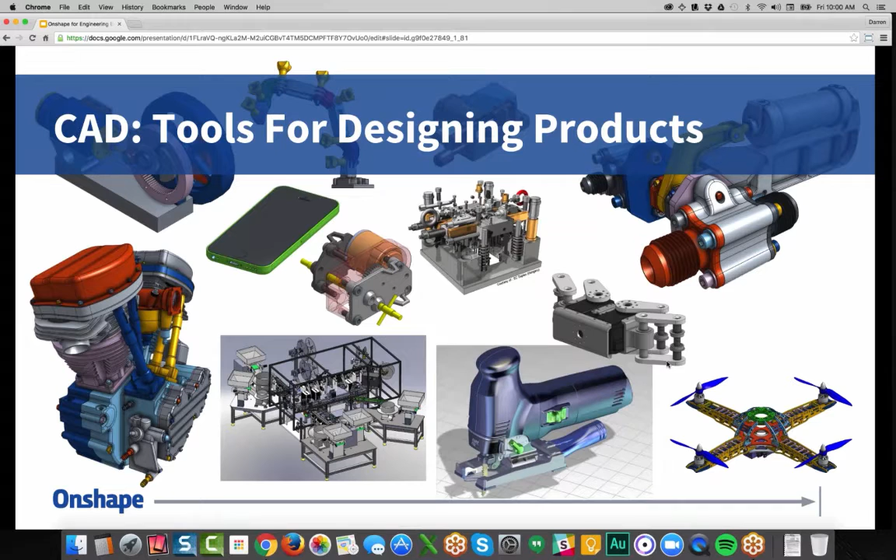Mainly, it's computationally intensive. There's a lot of graphic data, and you traditionally needed a high-power workstation to run these applications. We feel now that the internet, the bandwidth speeds, and the computational power can support 3D product development, and that's why it's an area which we're focused on. In fact, Onshape's the only company 100% focused on cloud and mobile CAD.

Now, the good news is that there's thousands of companies already doing production level work inside Onshape, and it's an area that's being heavily embraced. And if you look at our history, we were founded in 2012. We have a rich history in CAD. I'll talk about the pedigree of our company in a second.

But what's interesting is this is a movement that has caught the attention of some serious investors and experts in the high-tech field. In Silicon Valley, a number of companies have backed Onshape based off their vision. They agree with and support our vision of moving CAD into the cloud. We've raised over $169 million in venture capital. Right now, we have about 100 employees.

We're based on the outskirts of Boston, and the development team is not only CAD veterans, but experts in cloud architecture, data centers, and mobile computing. Now, I won't go through all these people, but if you're familiar with the history of mainstream 3D CAD, you may know a lot of our executives. The guy in the middle, Jon Hirschtick, was the founder of SolidWorks. He is our co-founder and chairman, and there's other executives that had tenure at SolidWorks during the early years.

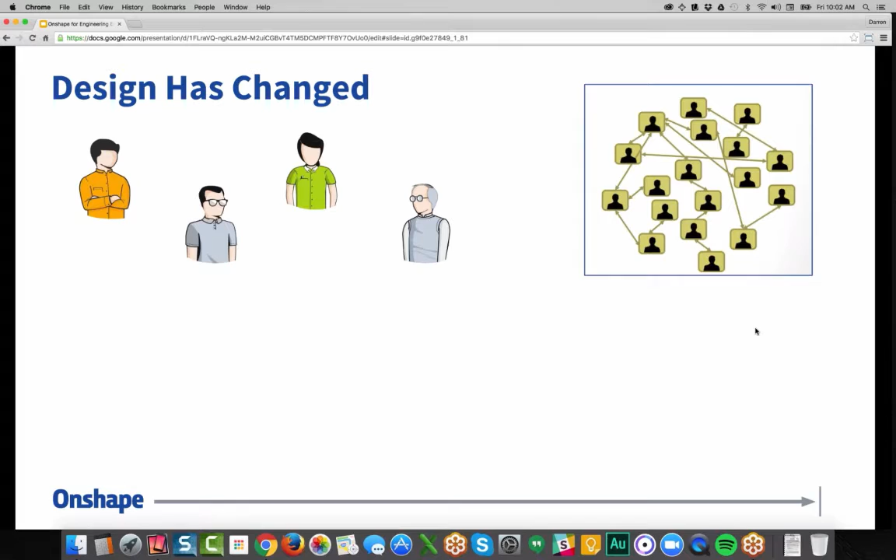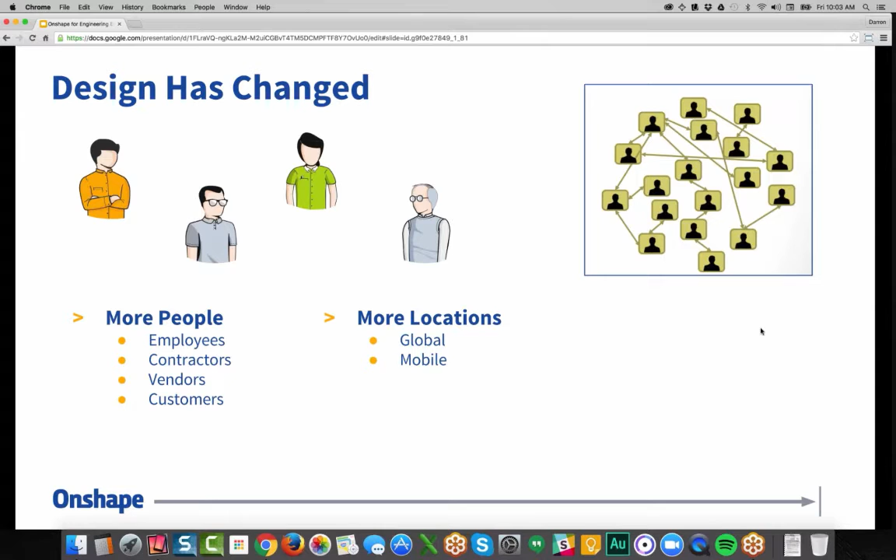You know, when we look at the world, and I was actually just reviewing some manufacturing standards that have changed, and they've changed because the world is becoming more complex for manufacturers. The supply chains include more employees, more contractors, vendors, and customers. The locations of manufacturers today, they've gone global and they're distributed. People are hiring based off talent, not location. So, the internet connectivity allows you to have both remote employees and global customer bases.

And we feel that with the speed of innovation there's constant pressure to increase your speed, your time to market, increase the amount of innovation you're doing on a product. You need to show that you can collaborate, and you need to show that you're very agile. Manufacturers today are seeing pressure not only from competition, but also small startups that have innovative twists on products because of micro factories, and someone can be very disruptive to the marketplace.

So we see a greater pressure for companies to innovate, and we see some challenges with the complex supply chain as well as the distributed workforce. And we think that traditional file-based CAD just offers a lot of friction when you're trying to evolve and handle these distributed supply chains as well as these new pressures to innovate. And let me explain why, and I think this will resonate with most people on this call.

You have an installed CAD system, and right away that causes friction. There's $5,000 license fees. Even if you hired an intern and had to get them up to speed on a piece of software, you're talking an out-of-pocket cost. There's a tremendous IT overhead, downloads, installs, updates, and these don't occur just once a year. These occur multiple times in a year if you wanted to stay up to date with the latest and greatest software.

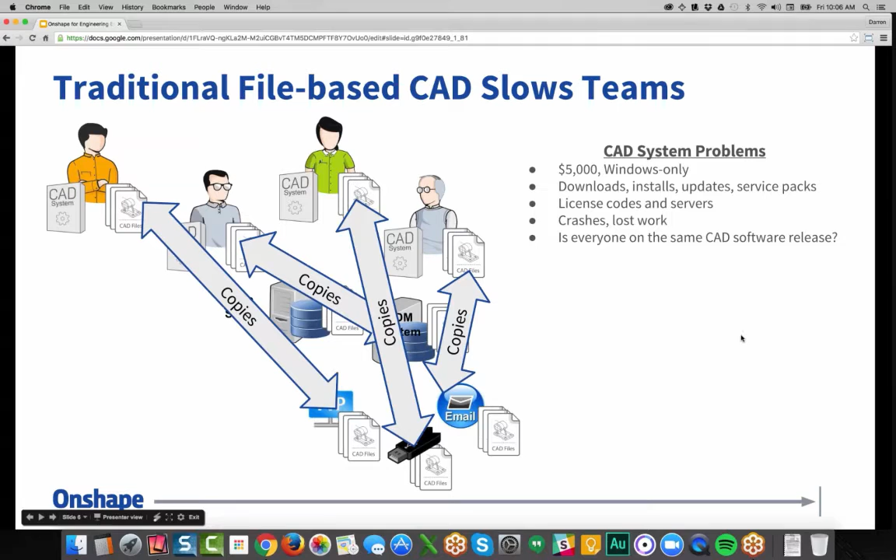When you add the data to the picture, you begin to realize, wow, people are creating data on their own computers. And then when they want to share it, they come up with different mechanisms, whether that be email, thumb drives, FTP, or maybe they put in file servers and PDM. All of these rely on copies, and that also causes problems, right? You're copying CAD back and forth to servers. You're emailing copies. You're FTPing copies of data.

And what happens is you then need to have complexity in ensuring that people have the latest version of the file. You're not overwriting someone else's work. Someone else doesn't have it locked and you need write access. It becomes a nightmare of just managing. And in many cases, the processes you put in place to manage your data can impact the speed at which you can innovate.

People are putting in now cloud drives. That has sort of sped sharing of data, but it's still working with copies. And you still have those problems with latest versions. Are you writing over someone else's work? Are two people working on different files? And then you have to do redundant work to sort of merge their changes.

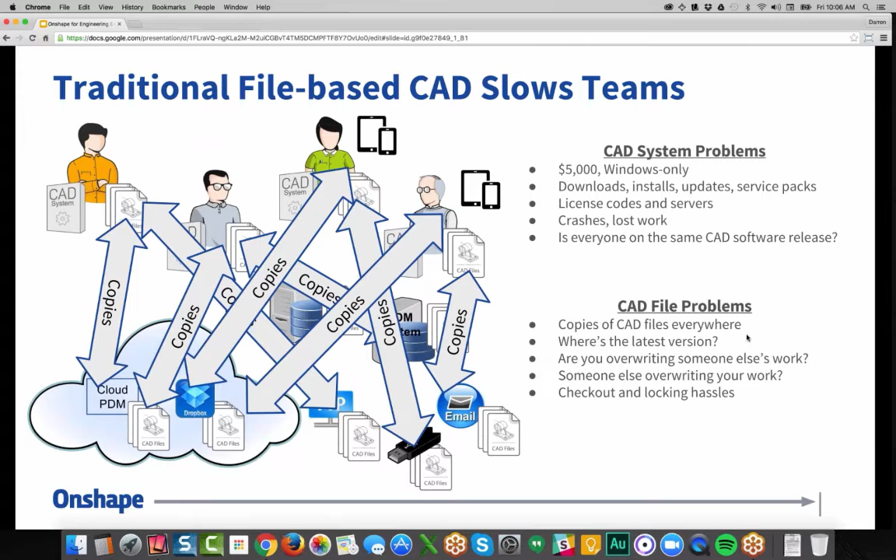So those are the hassles that we feel traditional file-based CAD has, and we think we can eliminate completely with a full cloud solution. And that's where Onshape comes in. The CAD system and the CAD data all reside in the same location. We're not a file-based system. We work off a database. And the beauty of this is everyone accesses the same CAD system.

There's no file incompatibilities. And when you share data, everyone works with a single database. So there's no need to do the redundant copies, and you don't have the management nightmare associated with that. Do I have the latest version? Of course you do, because you're working with the latest version. Everybody works with the latest version.

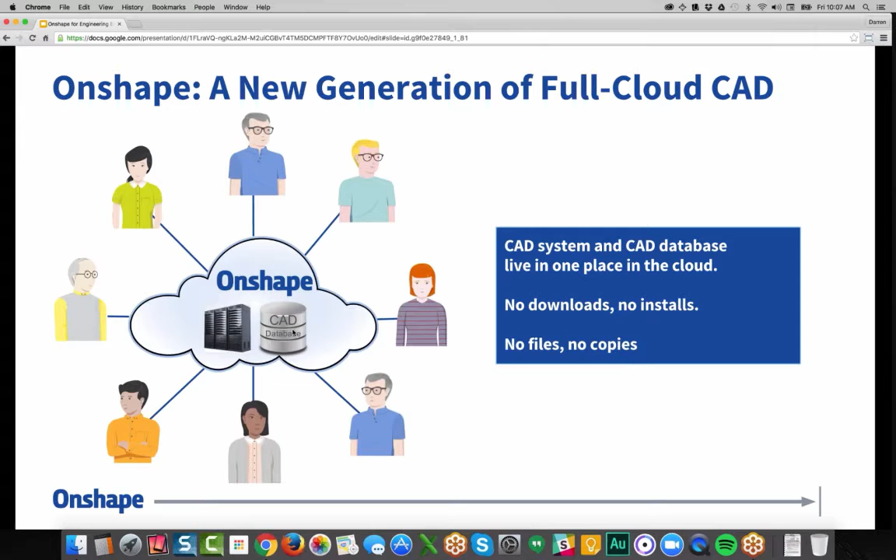Do I have the latest version of the software? Of course you do. Everyone on the planet will work with the same version of Onshape. Even as we do updates, everyone's updated simultaneously. Let me talk a little bit about updates.

We're a very nimble company, and we're putting out rich functionality every 3 weeks. This was 2015. We were in our beta period. We put out 14 updates, 125 new features. New features, now that's what a user would perceive as enhancements to the actual functionality. Of course, many more enhancements are done behind the product.

Okay, so the other thing, if you're not familiar, people then ask, well, what about the full manufacturing picture, simulation, CAM, and rendering? Well, guess what? We have an app store, and companies see the value of Onshape, and they're investing in integrations. We just launched this app store in Q1 of this year. We already have over 33 partners, and if you go to our app store, you'll notice that they include simulation, CAM, rendering, part libraries, all your standard parts and supplier content. There's productivity tools, everything like time cards and calculators. And then there's data translation tools, so you can quickly print or maybe export.

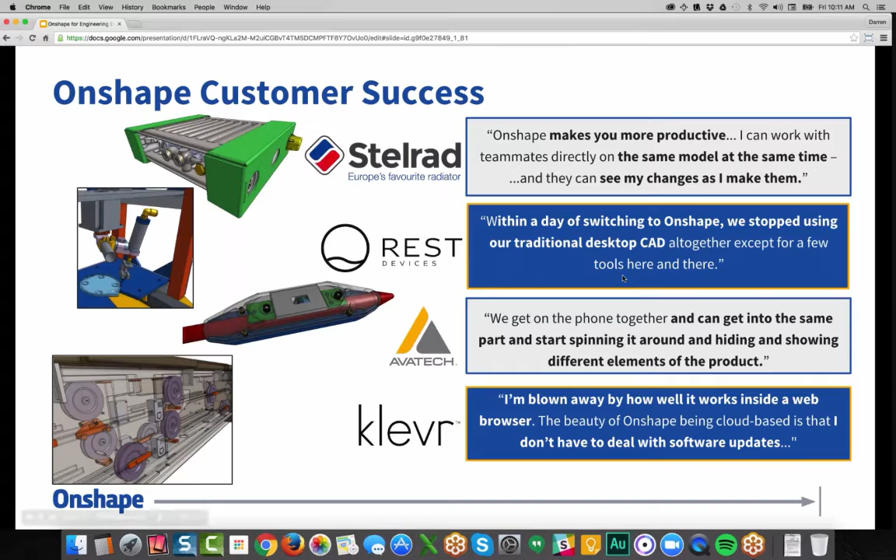So we're approaching over 1 million hours. Actually, we're over 1 million hours now of Onshape usage. People are doing production work. And we wanted to know the benefits that engineering leadership is seeing with full cloud CAD, where they see the benefits, and we wanted to give you some insight on how to start projects in Onshape. So that's what the remainder of this presentation will be, and I'll bounce in and out of this slide deck to show you. But the first thing that engineering leadership is telling us is that teams work faster in Onshape, and there's a specific reason why.

It's because with traditional CAD, the cycle of development is very serial, meaning people work in stages, one stage at a time. But with Onshape, you can work in parallel. And there's a specific reason for that, and it has to do with our technology. We allow multiple people to work on the same model at the same time, whether that be assembly or part. And that allows you to do things in parallel. It's that whole copy problem. You're not worried about overwriting other people's files. You're not worried about check in, check out with Onshape.

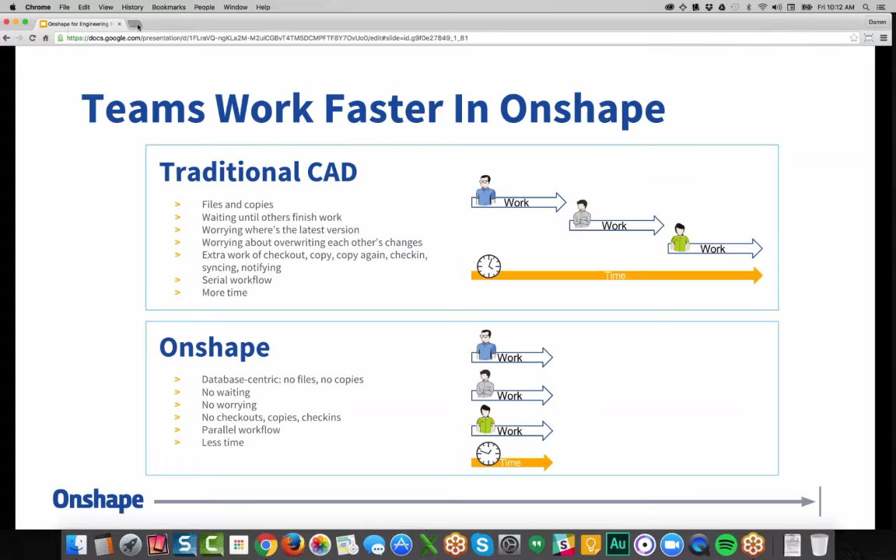And let me show you, if you haven't seen it, what that looks like. So right now we're in a Chrome browser window. I'm running the Google slide, and I'm going to go right to Onshape and sign in. Now, if you haven't seen our interface, these are projects. And I'll go to this project here, which is a rather large one. It's a casting in a manufacturing fixture.

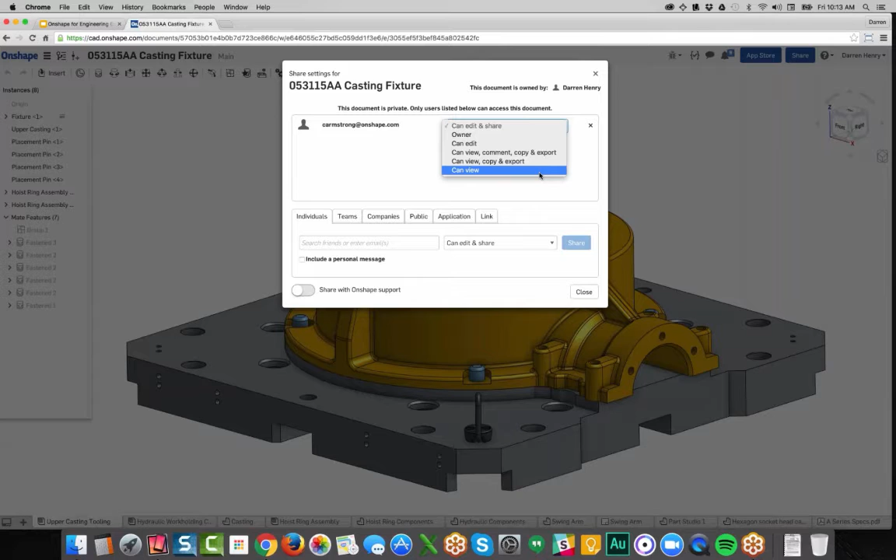What I'd like to show you is that any document you see here is a full CAD application running in your browser. Anytime you're working on a document, you can hit the share button and share with other people. In this case, I've shared with a peer of mine, Cody Armstrong, and you can set the permission on how they share. So I don't have to email Cody a file, I just share him into the one master version of this file up in the cloud, and Cody can join.

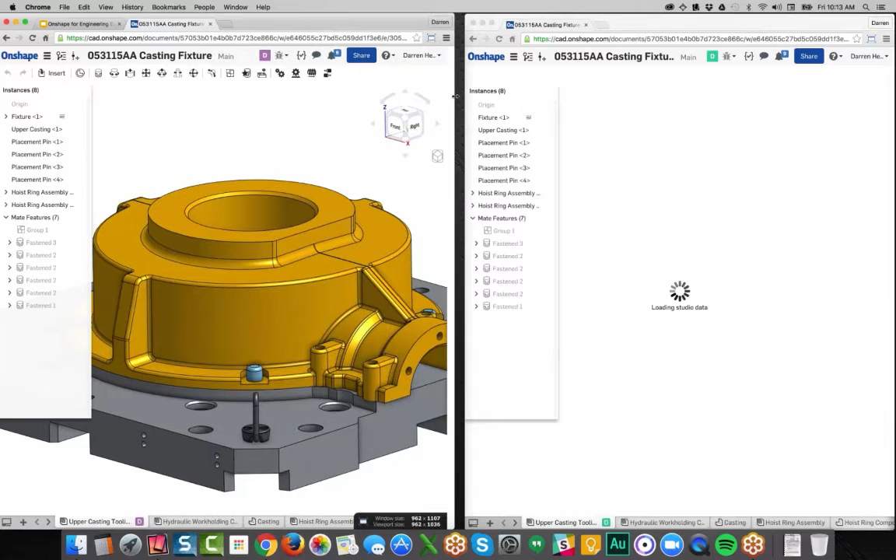I wanted to show you what that looks like, so I'm going to run two sessions simultaneously to show what it's like when two people are in one document together. We have Darren on the left and Darren on the right, and when someone joins the document, you can see their initial. So I have a pink Darren and a green Darren, and you'll just have to assume it's two different people working in two different locations.

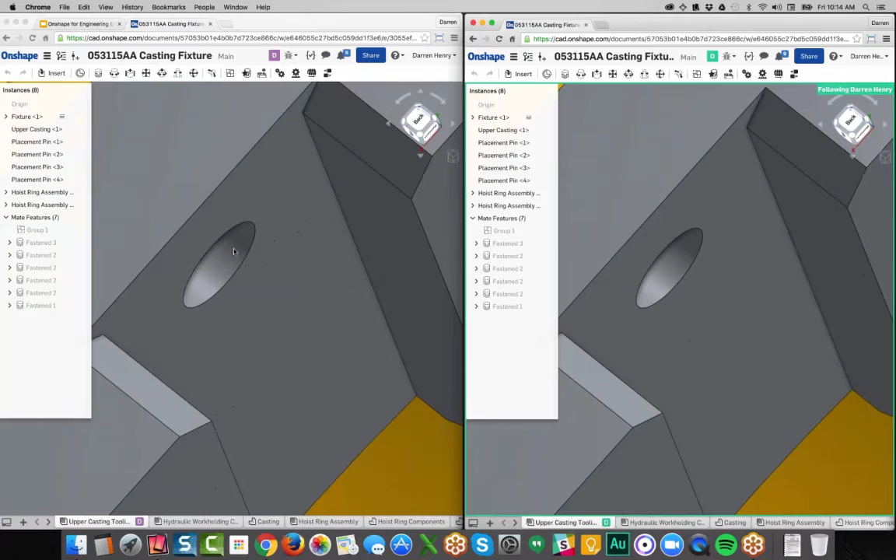One thing you'll notice is people can work on the same exact model with independent views. Now, if we were working together, maybe on a conference call, and we wanted to talk about this, we could sync our views. Just click the initial of the other person, and when that person rotates, you can see it too. So maybe we're talking about this positioning hole, and is it in the right location, that kind of thing. You can also work asynchronously - just click in the white space, and you'll have an independent view once again.

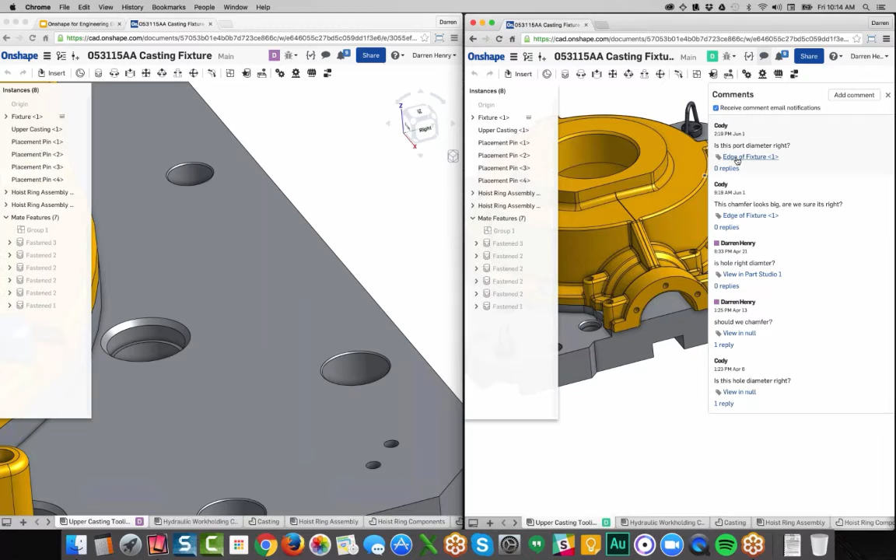Asynchronously, you can add chats and comments. Here, Cody added some comments earlier, asking if the port diameter is right. If I click that comment, it rotates exactly to the port, the orientation where he added that comment. So we don't have to work simultaneously, but we can. The important thing is no copies are needed - we're always working on the latest version of this model.

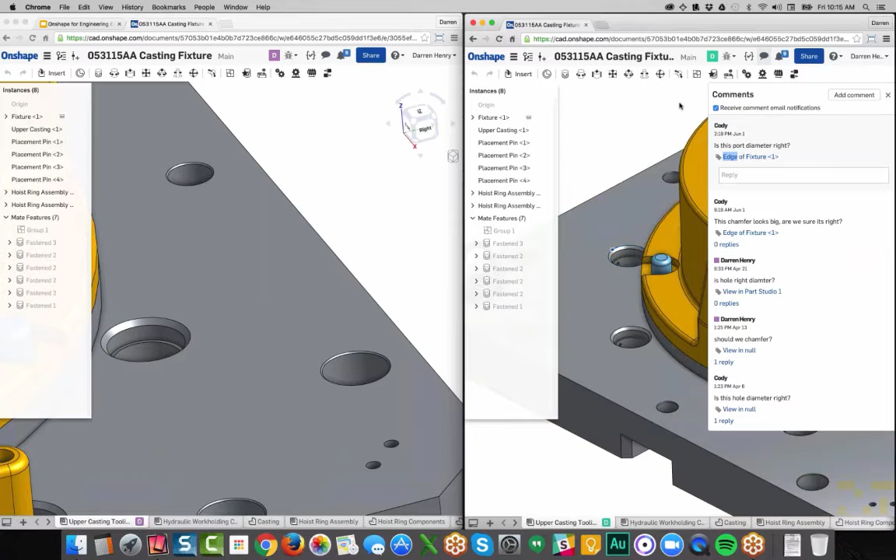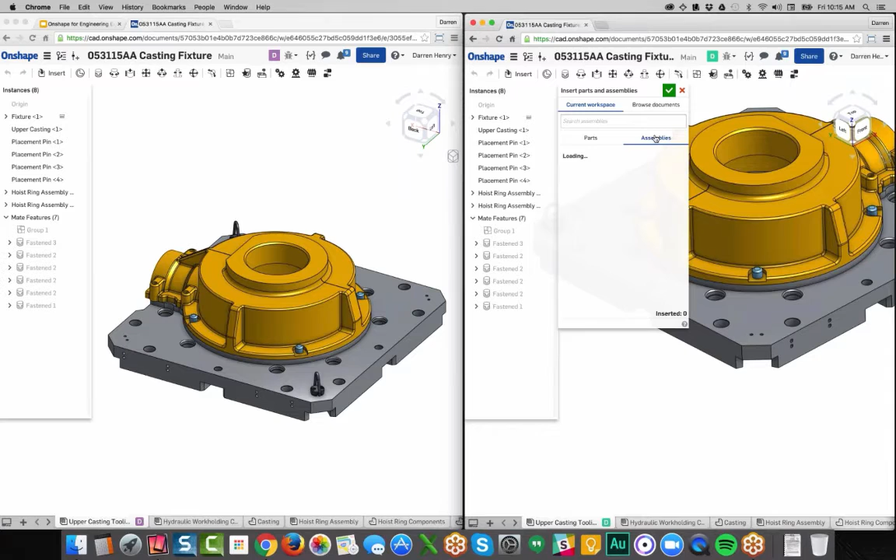But here's where it gets interesting, because we can work simultaneously. Let me go to an isometric view. So this is one view, one person working, and this is the other view. In this view over here, this person is going to insert a new work holding clamp. So we'll add this work holding clamp and place it out here in space, and the second I do that, you'll see that work holding clamp appear in the other person's screen.

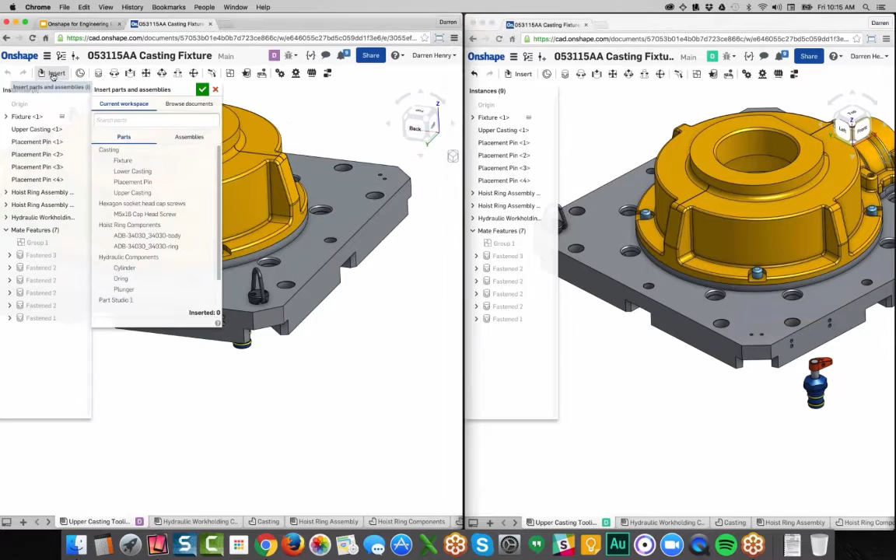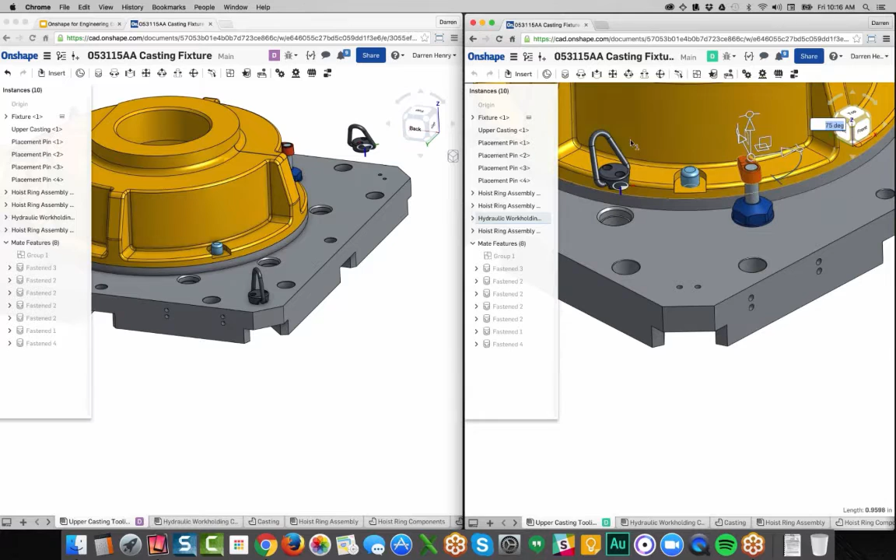We are working together. This person might insert a hoist ring over here, and when that person inserts that hoist ring, you can see it appear right here. This person may go ahead and fasten the work holding clamp into position. If you haven't seen us do this, it's really quite amazing - we just pick two points and solve, and you can see it's positioned correctly. You can rotate it around and position it in the right orientation, and you can see the clamp is now in the right orientation over here.

This person may go ahead and build upon the work of the person on the right, and maybe replicate that hydraulic work holding clamp into all of the hydraulic ports. So let's do that right now. You can see that, and when I accept, all the hydraulic clamps are over here.

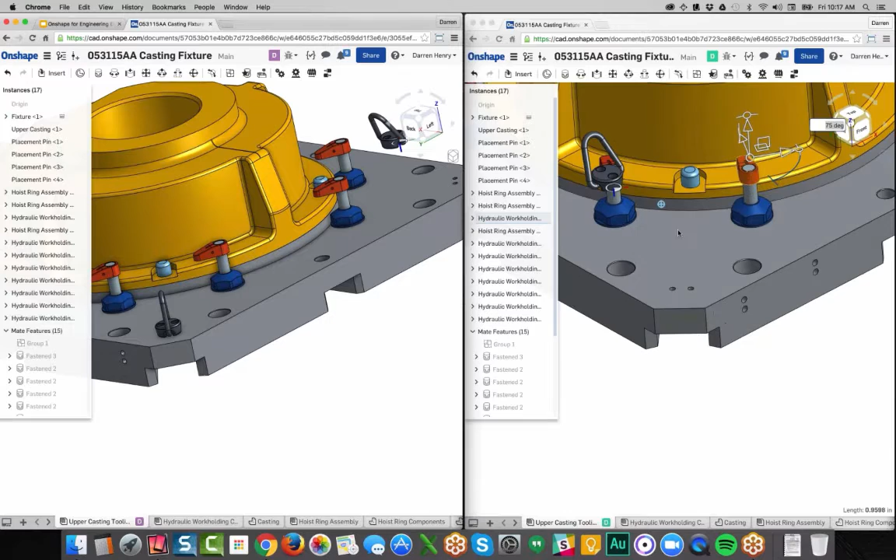Then, if there's any tedious work, like say a customer is coming in and you want to position these, or you're doing a rendering, we can work together. This person can quickly move this clamp into the right orientation, and this person could move another clamp into the right orientation. So we're sharing workloads, whether design workloads or assembly workloads. We can do it simultaneously in a shorter amount of time, and we're the only CAD solution we know of that allows this simultaneous editing.

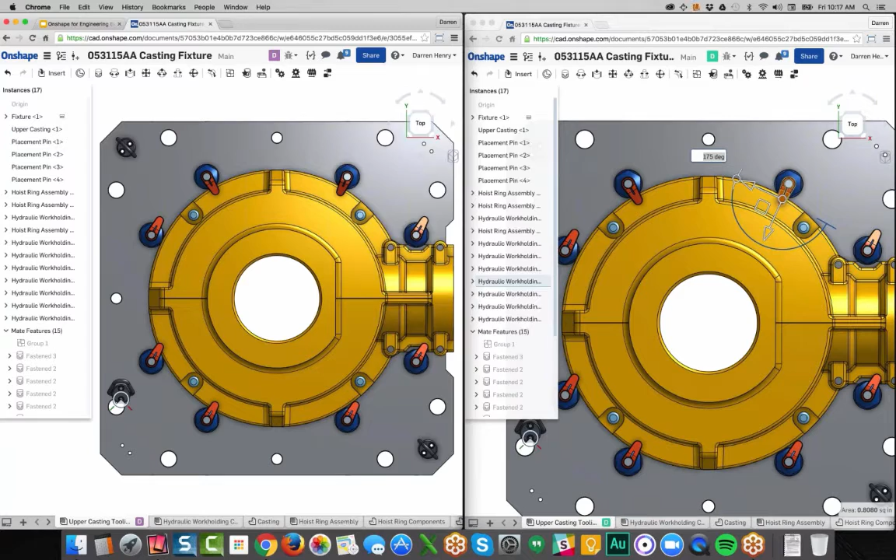It's really quite powerful. Just to take it one step further, I'd like to show you how we can access this on a phone as well. Onshape has apps that work on tablets and phones, and I'm trying to actually broadcast my iPhone to the screen. There it is. What I'll do is run the Onshape app.

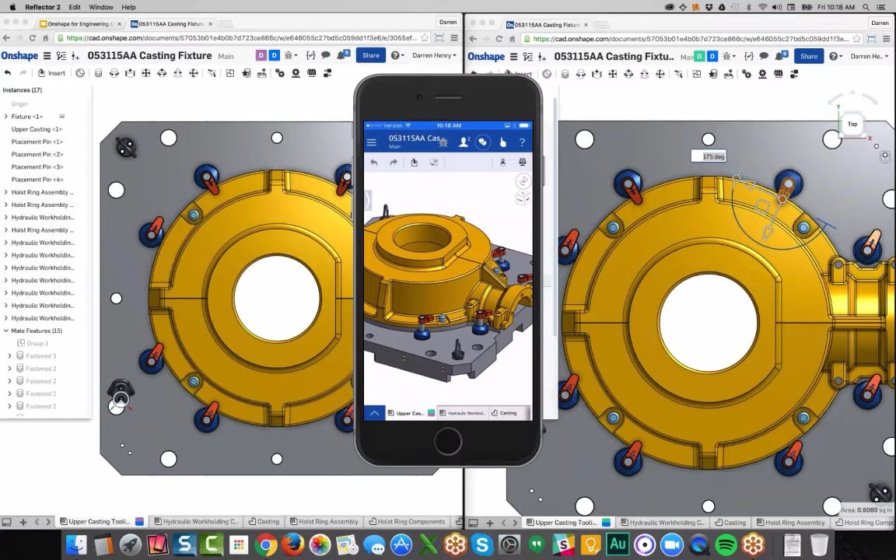Even though this is on a smartphone, we have the ability to use a full CAD system. We're leveraging the computational power of other computers, the Onshape servers, and it works extremely fast no matter what device you're on. We've optimized the interface for smartphones.

What I'm going to do is go to the swing arm. Here you can see the red swing arm in the rest of this fixture. Let's zoom in on it.

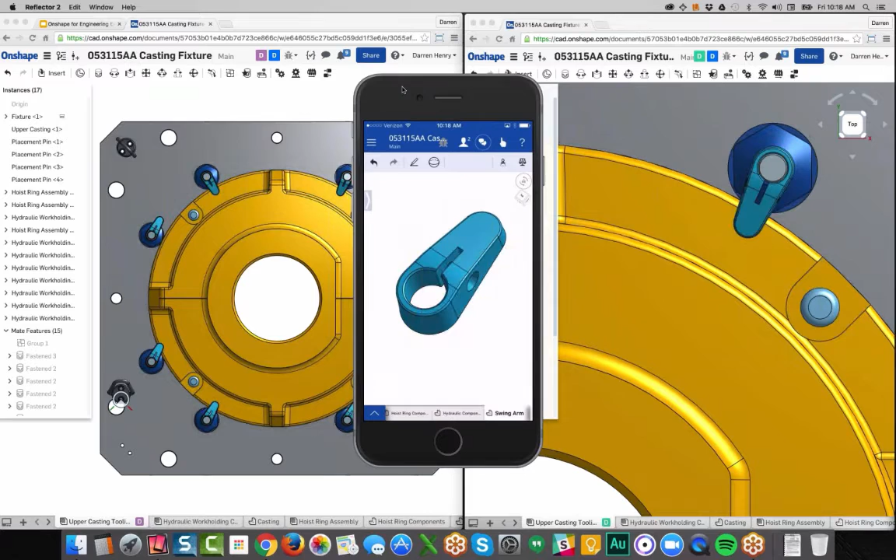You can see that even with mobile devices, we have the ability to work together. I'm just going to change this appearance to something slightly blue, and when I accept, you see that everyone's document updates.

This could literally be an engineer on the East Coast, an engineer on the West Coast, and somebody at a customer site editing data simultaneously together and saving cycles, because they're not waiting till they get back to the office, or waiting until someone else checks in a file before they can do their work. We're working together. I think this is a great example of the potential, and this is what companies that have embraced Onshape are recognizing as a huge benefit.

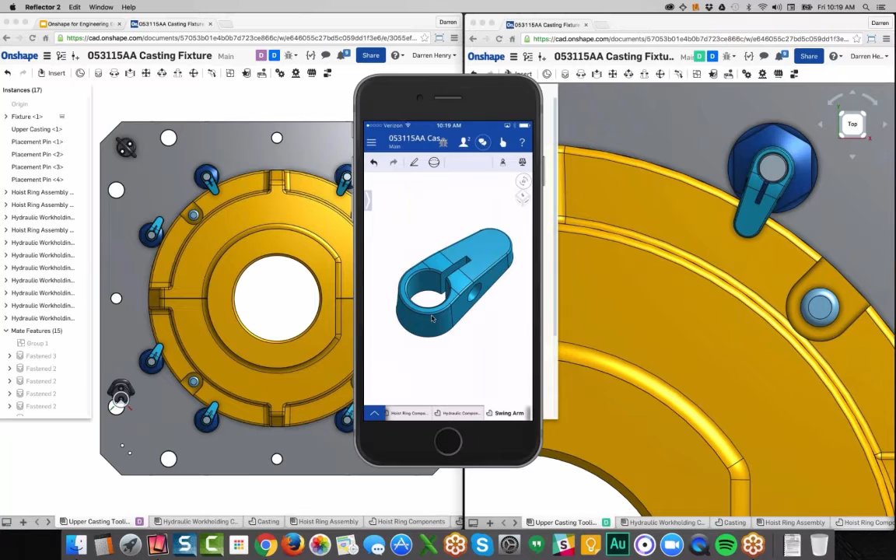Okay, let's go ahead and shut this window. I'll stretch this out and we'll continue the presentation and talk about the second benefit we're told exists, and that's better version control and faster iterations.

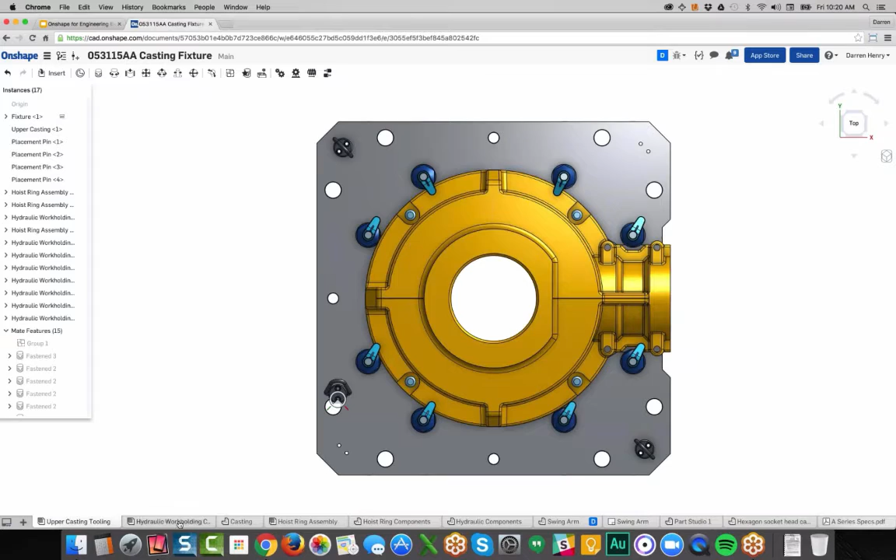Not only are we working together, but realize too that in Onshape we're storing all the project information in one location. It's not file-based. Here you can see we have not only the hydraulic work holding clamp, we have the hoist ring assembly. It's all stored together in this project.

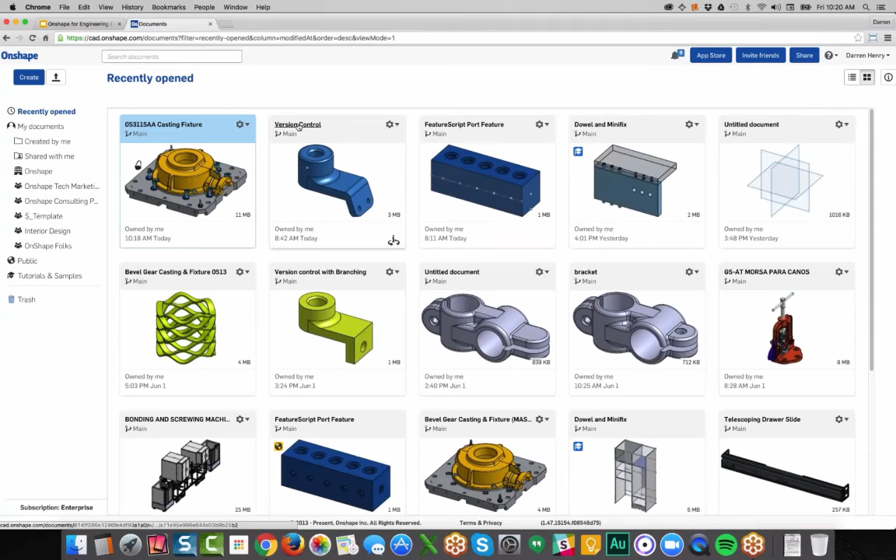As the project evolves and we're reaching milestones, everything is version controlled together. Version control is built in. Let me jump out of this document and go into a new document to talk about our version control capabilities. It's important to know that you never save in Onshape, and Onshape is constantly recording the history of every interaction you do.

You can restore to any point, any state, no matter how old the document is. I can restore to states from last year if the document was created last year. So you can recover - you've got really unlimited undo back to the origin of the actual model.

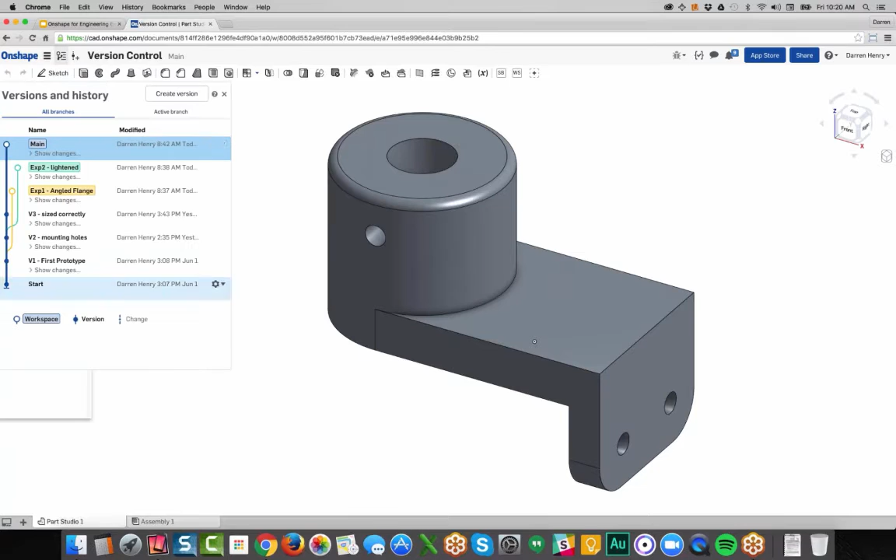But if you're not familiar with our version control, the idea is when you reach a milestone, you can create a view-only, write-protected version - what we call an immutable version. So it's always protected, you can always get back to that version, and everyone can see what the latest version is.

Look at our graphic tree if you haven't seen it. Let me make sure you're seeing this on GoToWebinar. So the dark circle represents versions, and the open circle represents work in progress.

We're not doing save-as-copy. It's all stored together - work in progress, different variations, as well as our versions, all stored in one location. So if I asked you, even if you're not familiar with our tree, what's the latest version? Chances are you'd say V3. It's the darkest circle at the top of the chain, and it tracks when that was created.

If I ask you how many versions have occurred in this history, you'll say 3. If I ask how many workspaces have occurred, you'll also say there's 3, and the latest is on top - it's our main one. These are stages, sort of bookmarked states of the model at different locations.

Think about what you would do in traditional CAD. You would do your different versions as you're evolving your product, and as you want to test variations, you would do save-as-copy, save-as-copy, save-as-copy.

So here we can look - the main version, the latest work in progress, is what you see here. It's a simple bracket. It does not have any fillets on the main body, but it does have fillets on the side.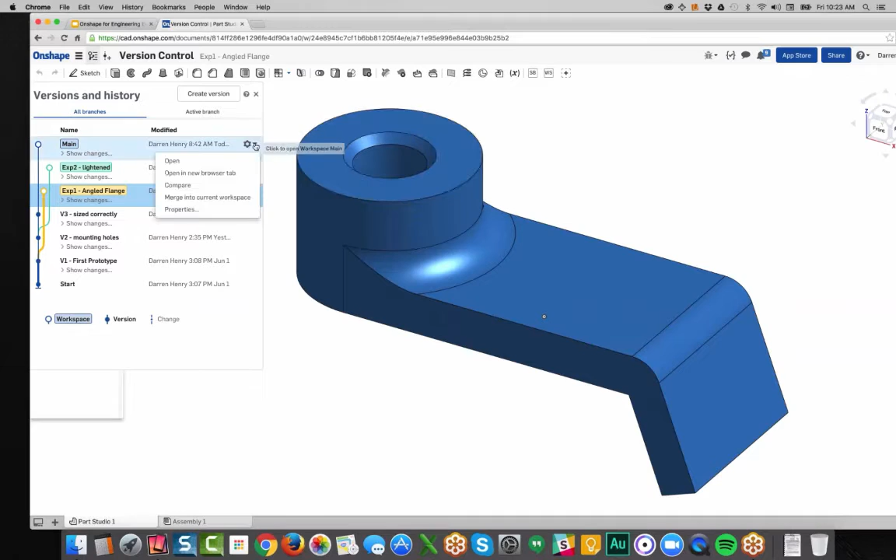Well, we can compare it. So let's do that right now. We're going to hit compare, and Onshape, because everything's stored together, can give you a visual comparison of two different states in the model.

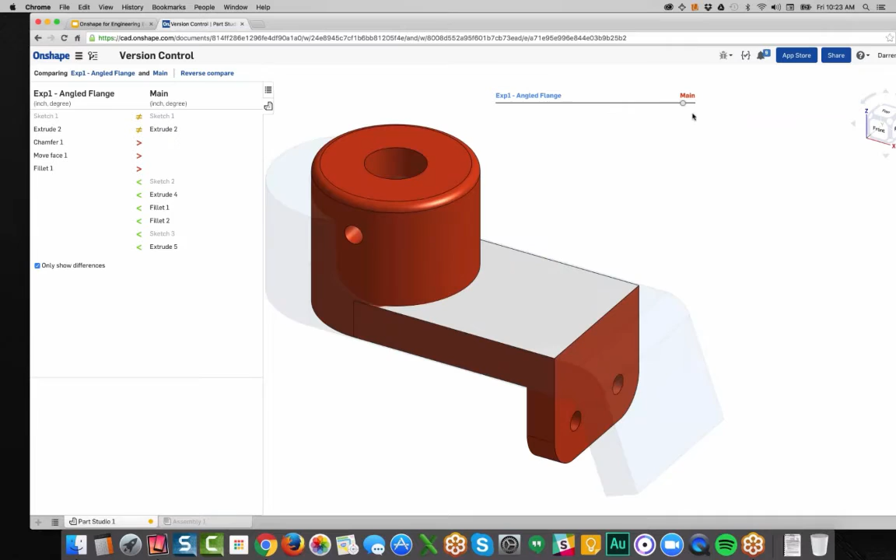The experimental has an angled flange, and the main one is a different size altogether. You can see that the new one has a pilot hole on the side, a fillet here, and two holes as well. You can see that graphically using the slider, and you can see in the history tree that sketches and an extrude exist in main that don't exist in experiment 1.

Okay, so as we look at this history, let's go back to the main workspace. We can see we've done these two experiments.

Now, what would happen in traditional CAD if you did a save-as copy and worked on the angled flange, and then said to yourself, I really like that angled flange, I'd like to incorporate it back into my main design? You would recreate that angled flange from scratch. That's how traditional CAD works. You try your variations, and then you do redundant work to merge that into your main design.

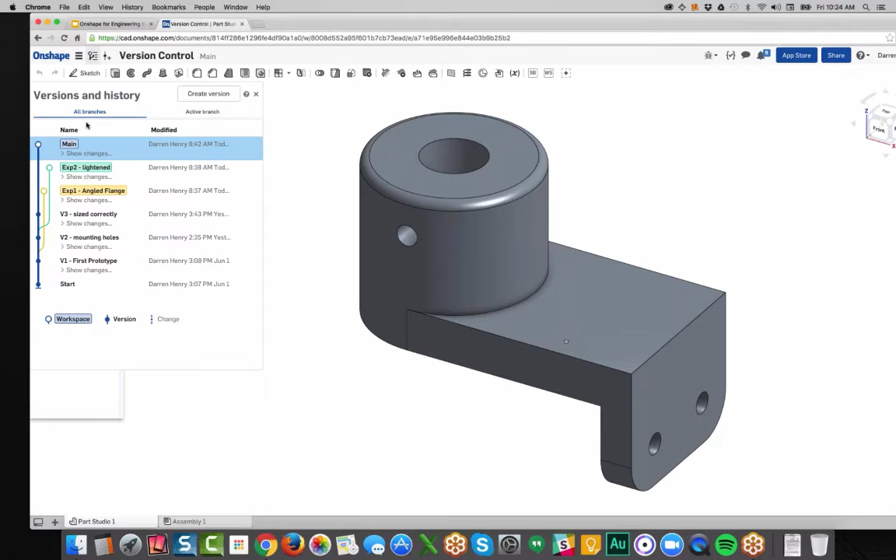With Onshape, because we store it all together, there's no copies of files. We can take advantage of work done in different variations and merge them together. Let me show you how that works.

We're in the main workspace, but we like something in the angled flange workspace. We can just say merge, and look at that. The result is you have the pilot hole, the chamfer from experiment 1, the fillet from your current work, the angled flange, your holes, and the fillets. Everything is merged together, and it's in the history, so if there's something we don't like, like this fillet, we could simply suppress it.

So you have full control. But the important thing here is we're not recreating work. It's a fast way to iterate, and because we store it all together, everyone can access the different iterations. It's very clear and easy to understand what is the latest version, the releases, versus what's work in progress.

Okay, hopefully that makes sense. Someone's asking, do you have the concept of revisions as well as versions? Right now we don't. So what people are doing for a major release is renaming the versions something different. But it's a good question. Remember, a lot of times people check in and create a version just to save their work. You don't have that requirement with Onshape.

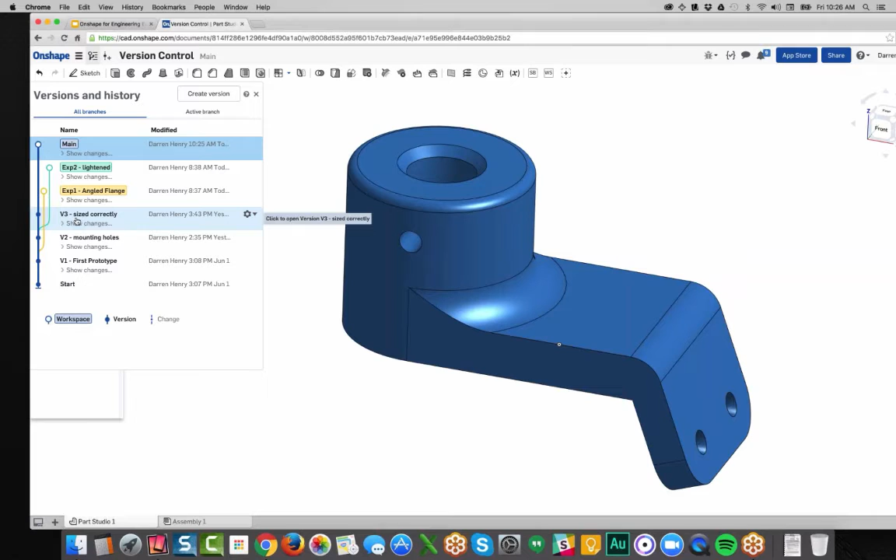Okay, let me run back to the slide and talk about another advantage people are reporting, and that's easier to work with suppliers and customers. We surveyed a lot of people. The number one way people are sharing data with customers and suppliers is through email and something like Dropbox.

And that's, again, creating copies. You share with the supplier and then decide to make a change. You have to remember to let the supplier know. Or you're sharing with a customer, same sort of thing. Or worst case, the supplier makes a change, and you have to update your data and communicate that to the customer. With a lot of copies, you're managing a lot of things.

But one thing we're really finding is a headache when dealing with companies outside your organization is file compatibility. People are saying, wow, you sent me a SOLIDWORKS 2016 part and I have 2014. You sent me a Creo 3 part and I have Creo 1. That type of file incompatibility.

Or you're hitting file size limitations. Hey, I tried to email you the file but it's over 10 megs and your mailbox only allows 4 megs. Can you set up an FTP site? Sure. Oh, I don't have access to Dropbox, we use box.net. There's a lot of headaches that go along with that, friction.

With Onshape, we remove all that. If someone doesn't have an Onshape account and you share a document with them, we create one for them. All they have to do is set up their password. So it's really neat. Let me show you how that works.

By the way, before I leave the slide, everyone can translate data on the fly with Onshape, and that's interesting too. So let me show you what I'm talking about. If we go back out, we'll create a brand new document.

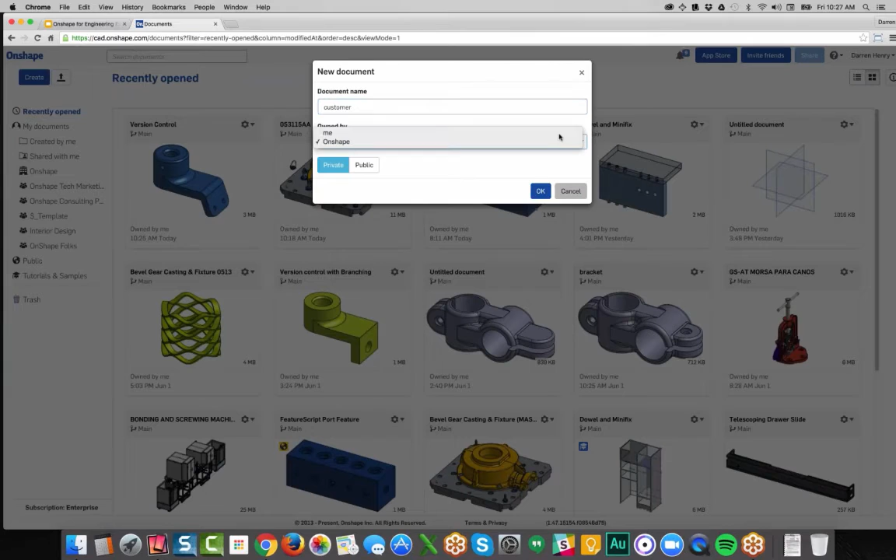And we'll just call this customer. So let's say we want to share something with a customer, and this is an empty document. When you create an empty document, you get 2 tabs at the bottom by default, a Part Studio and an Assembly. I'm going to delete this Assembly. It's empty, so it's pretty clear.

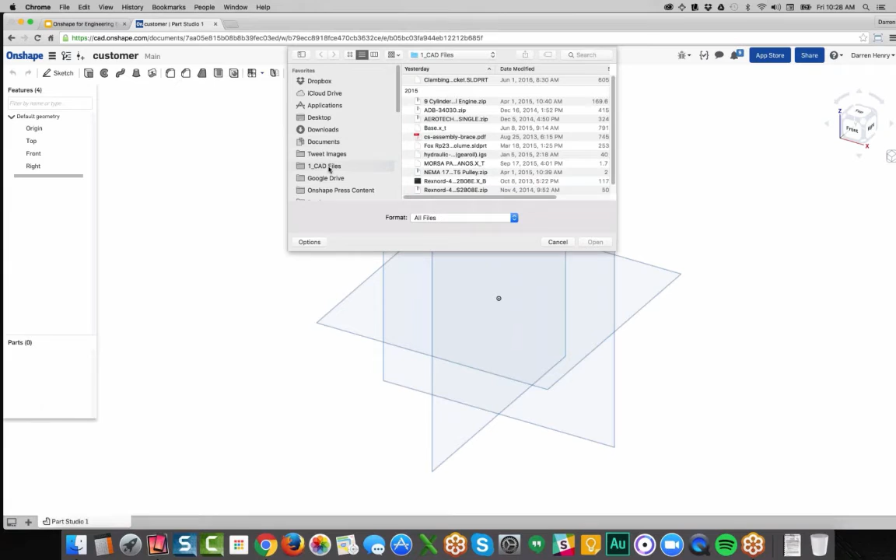And I'm going to actually upload, and in this case, I'm going to use Onshape to share a SolidWorks native document. So I'm going to hit Import. I'm going to go out to my drive, and I'm going to grab this bracket, which is a SolidWorks SLDPRT. Now, the first thing you'll notice is 2 more tabs appear. It's very quick, right? 2 more tabs appear right here. And in fact, I'll delete this empty one so you can see.

So the first tab that appears is the SLDPRT file. The second tab is the translated file into Onshape. So this gives you the full geometry, and there it is. And you can see it's imported geometry. It came from SolidWorks. This is in the cloud. This is in our data storage.

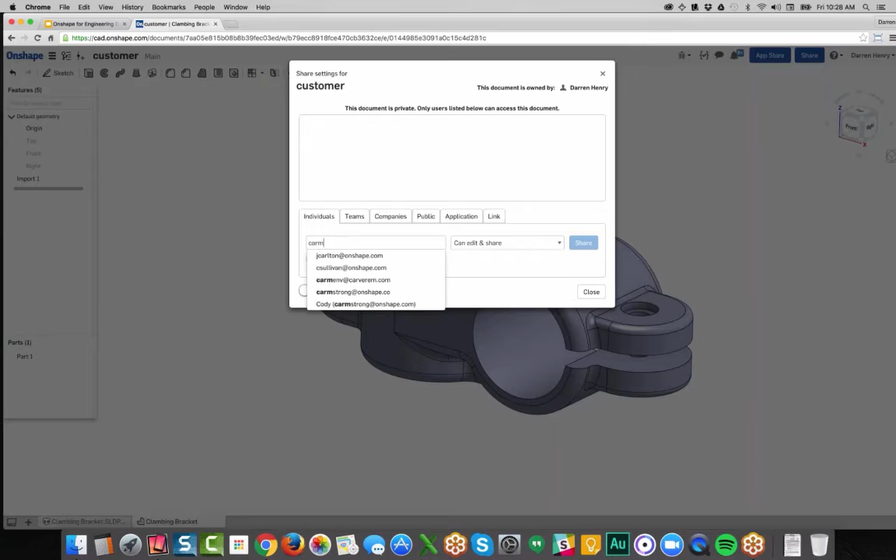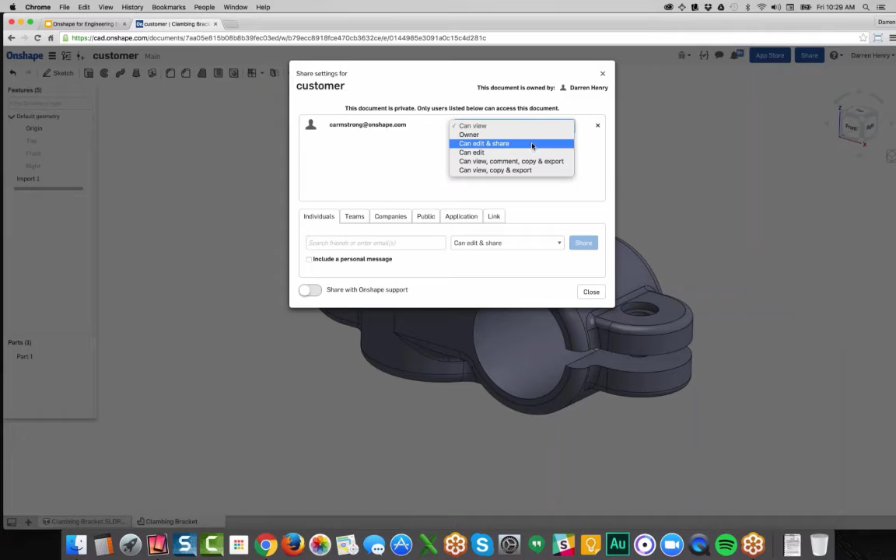So anytime we just hit the share button and put in anyone's name, we can say, hey, we'd like this person to access this data, maybe edit and share, maybe view. So we'll just have this person view. Okay. At any point, we can change their permission. You know, maybe it was view to give us a quote. Now we decided to go and do business with them, so we want them to be able to edit. So we changed their permission.

Maybe we didn't like their quote. Have you ever tried to retract an email? You can't do it. Here, we basically can just stop them from having access to this document as well. Just hit the X and they're gone from the document. They don't have rights to access your IP anymore.

But here's what's important. Anybody you share this with, or if this file was shared with you, and you have SolidWorks installed on your PC, this is a Mac, but let's assume you had a PC, you can actually download that native SolidWorks data and work on it just like you would downloading a file out of Dropbox. There it is. SLDPRT, I'll open it up in SolidWorks, I can work on it. Let's stay with this scenario for a minute. So you do have SolidWorks local, you download it, you can work on it.

But let's say you have an older version of SolidWorks. If I shared with Dropbox or I emailed you, you'd get a phone call, and the phone call would be like, hey, can you translate it out to a Parasolid because I have an older version of SolidWorks. And you're doing that same process over again. Then they call you and they say, hey, I'm having a problem opening the Parasolid file. Hey, can you add the parts? You didn't add all the parts in the assembly you shared. These are all common phone calls that people get when they try to share data outside their organization.

But with Onshape, this is the SLDPRT tab, we're working with the file, and if you had an older version of SolidWorks, no problem. Just hit export and write out your own Parasolid of this SLDPRT. You can translate on the fly. In fact, if you had Pro E, go ahead and write out a STEP file. If you have Autodesk Inventor, write out an ACIS file. Obviously, IGES, we even support Rhino.

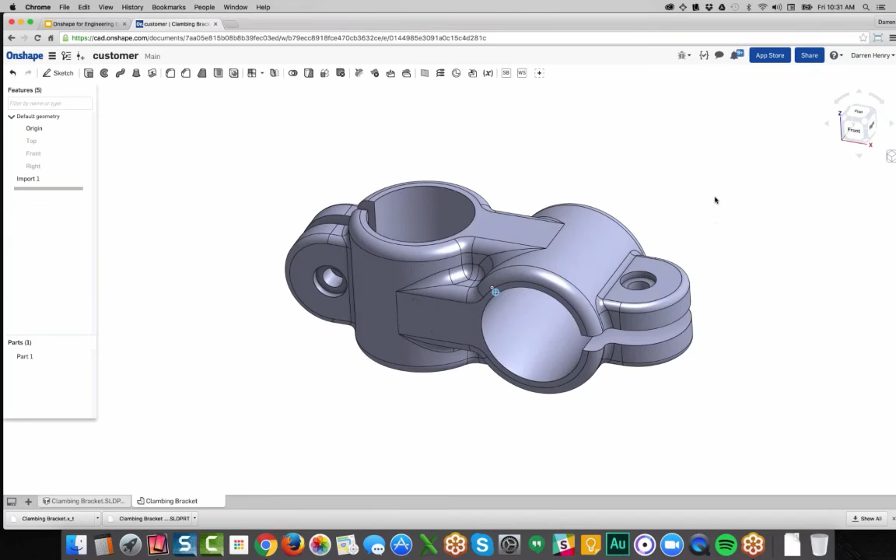And here it is. Look at this beautiful model, fully precise. We're based off the same kernel as SolidWorks. So SolidWorks translates very nicely. And look at this. You have all these direct editing tools. So we can actually change holes, and we'll change this hole here in distance, maybe make it smaller. We could wire that down with the dimension if we want. We can change fillets. Let me try that right now. I'm going to try to change just this fillet here, 0.125.

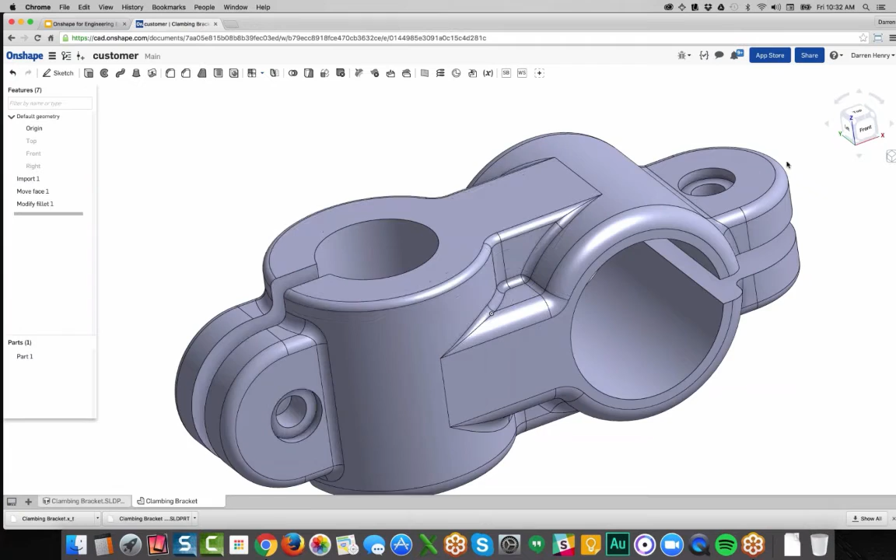You can see I can change fillets. I can add fillets to it if I want to change more of those. Sort of nice, right? We can delete features too if this hole's the wrong side, or move holes.

Let's try to move this hole. I'm just going to hit move. I'm going to pick this face, and this face. We'll move along this direction, and we'll just move that a little bit like this. You get the idea. You can do a lot of direct editing capabilities right within Onshape.

And remember that version control. So let's say they downloaded that SLDPRT and they made a change in SOLIDWORKS. They can upload it back in and hit version. And guess what? Now you have version control tracking with your suppliers and your vendors. It's really nice.

And this is what people really like. They're mandating that Onshape become the way to share data because they can translate on the fly, always see it in a pinch. They can open it up on any device. This SOLIDWORKS part is now viewable and editable on a tablet. When has that occurred? Using SOLIDWORKS native geometry, it now works with Onshape.

One thing I want to point out too is, think about supply chain visibility. With our enterprise level package, we're showing you analytics because we track everything people do on the server. And for enterprise customers, we want to allow you to have that data to make better engineering leadership decisions. So with our enterprise, this is actually coming. This is something that's not released yet.

But you can see that a company here, Presidential Engineering, could actually look at their users. They can find out things like how security is set up per user. When was the last time they accessed the system? You could dive into a user and find out what projects he's working on. And dive into projects and tell who has access to that project and how many hours they've put in.

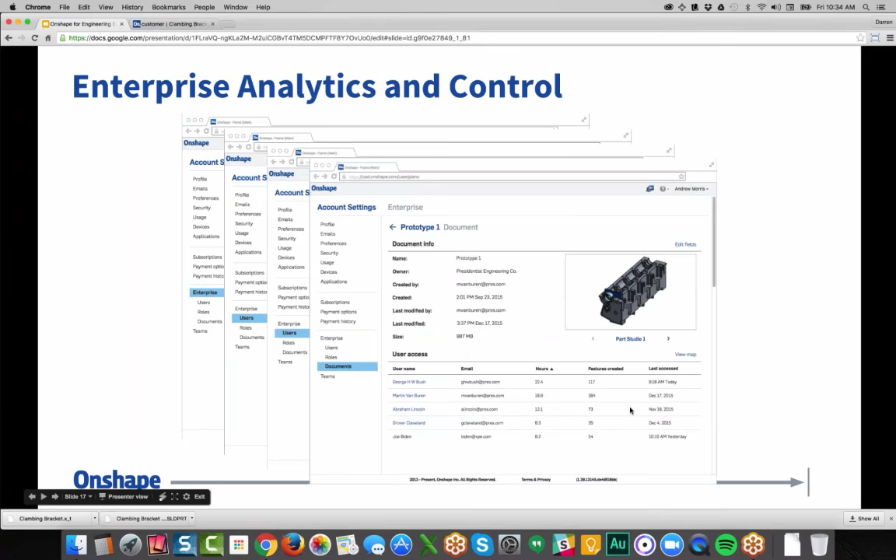So it's really nice. Let me go back one and talk about users. I clicked too fast. You can see the really nice capability where you can dive in and see exactly what a user is working on and how much time they've put into it.

People are telling us that Onshape has greater affordability. So, look at the hidden fees associated with traditional CAD. There's license fees, annual maintenance and subscription, data management costs, hardware costs. The hidden fee is the IT requirement to maintain and update. People updating drivers, people downloading large updates. Maybe it's the annual update, maybe it's a service pack.

Engineers waste half a day reconfiguring their system every time an update's pushed that they want to adopt. We're looking at total first-year costs between $12,000 and $18,000 per user. With Onshape, you pay as you go. We have monthly subscriptions as well as annual. $1,200 per user per year is our annual subscription. But you could easily scale that up monthly with interns and everything. You just pay $100 a month.

And your hardware, we run on mid-range computers because we're doing the computational work on our servers. So this means you don't need to buy the latest and greatest portable workstation. You can run on mid-range computers. We have videos of people running on a $300 Chromebook. So you're spending between $800 and $2,000.

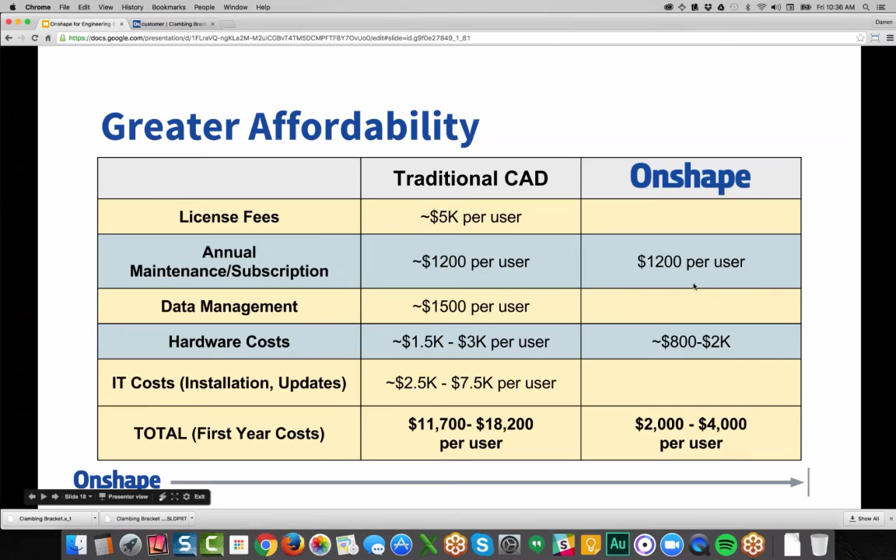By the way, people ask, well, what about uptime? It's true we need an internet connection, but our servers are up. 99.9% is what we're averaging now. It's an incredible amount of uptime. And we're really removing the burden of crashing.

Think about it. Every time you run an Onshape session, we're refreshing your session for you. It's a server dedicated to CAD. It doesn't have other applications running. There's no conflicts with other applications. And we virtually eliminated lost work because we're recording everything as you go. If there is a problem, you just refresh your browser and you're good to go.

I showed you it running on mobile devices. You may ask, well, are you just viewing or are you creating and editing geometry? With Onshape, we're finding 1 in every 6 sessions is being run on mobile devices, and our professional users are editing, creating versions, and creating new CAD geometry on the mobile devices. We have some that are only using our tablet interface. They don't even use workstations.

So it is being adopted heavily by our professional users, and we're real excited about that. It was something we weren't sure of as we went to market, but it seems like it's resonating very well with our professional users. You can download those apps free on the Apple App Store as well as Google Play.

Okay, the last thing I want to show you is how you can customize Onshape, because this is something that really increases productivity no matter what industry you're in, and that's the ability to customize CAD. Onshape is the first professional CAD system to share its source code on how we write our features, the features we use to create geometry.

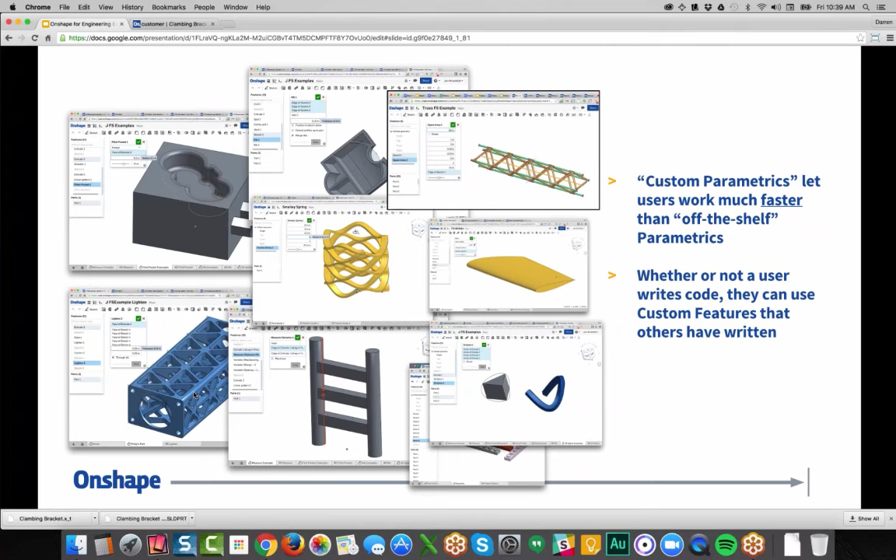If you do something over and over again and wish the CAD company would address that need, you now have the power to address that need yourself within Onshape. You can build your own features. You can utilize other people's features, and there's a number of them out there to share. And you could actually pay somebody to build it if you didn't have programming skills. It's really exciting. Let me show you what I'm talking about.

So I'm going to go out, and we're going to talk about a company that makes hydraulic manifolds over and over again. So we're going to go to this port tool. Now, they make a hydraulic fitting, and this is something that a CAD vendor may not invest the time in building, a hydraulic port generator, but with FeatureScript, they can. So notice, here's all the standard features. With Onshape, we can just use a port feature.

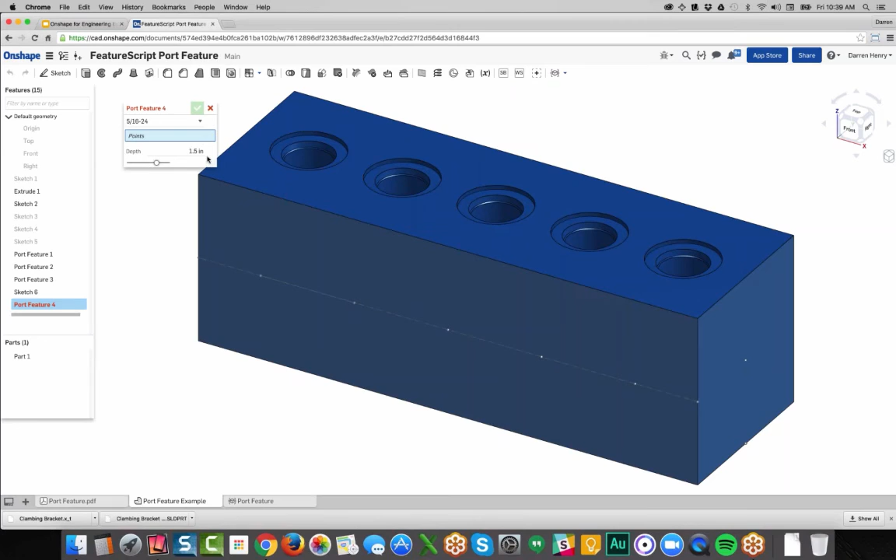The interface is built by Onshape. They don't have to program the interface. They have a number of different sizes to choose from, and all you have to do is pick a point. And this actual code was generated in a few hours by someone in marketing. It wasn't even a programmer. And we can even pick a face here and put it on a different face. And now that that feature exists, it's completely editable. Just like any other feature, it can be reordered. And it really just saves productivity.

Think about if you generated these ports over and over again, how you would do it. With Onshape, you can build that feature, and it works just like any other feature. It's not overlying code that you're not sure if it will break when the software vendor updates the software. This is using the same code as our traditional features. You never have to worry about it updating or updating your macro. It will always work just like our code does.

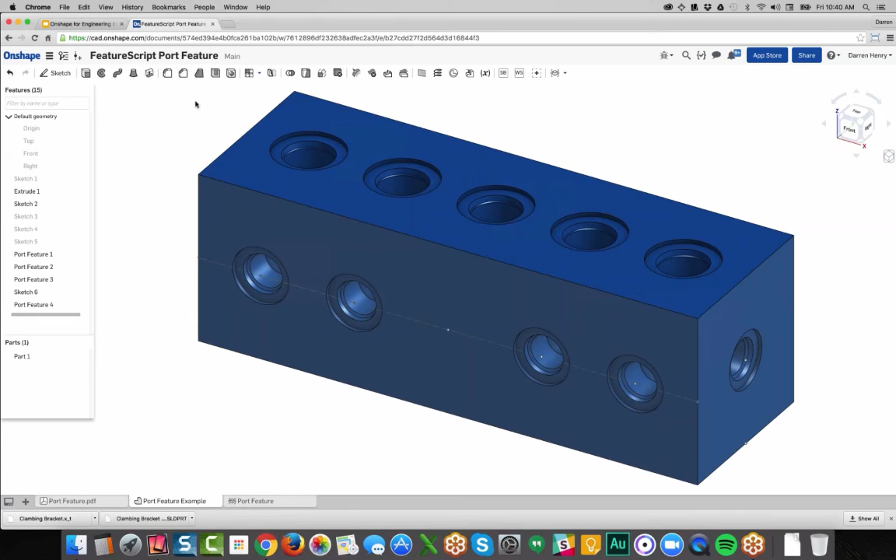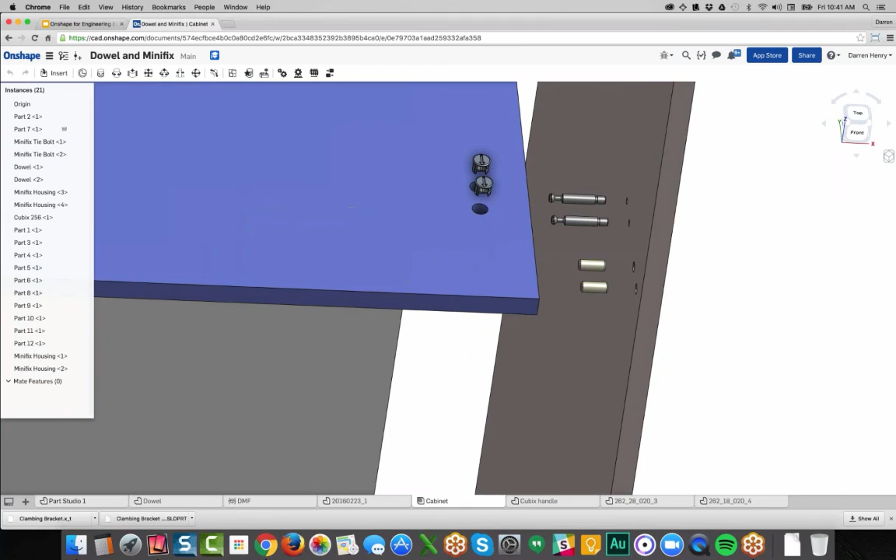I'll show you another example. This is one from a furniture manufacturer. This is called Dowel and Minifix, and if you look at this cabinet, this furniture manufacturer over and over again uses specialty fasteners. This is called a Minifix fastener. And I'll go to Part Studio 1 and show you how they built a custom feature. They actually used a college student to program this for them. But let me show you how it works. I'm going to delete this and show you from scratch.

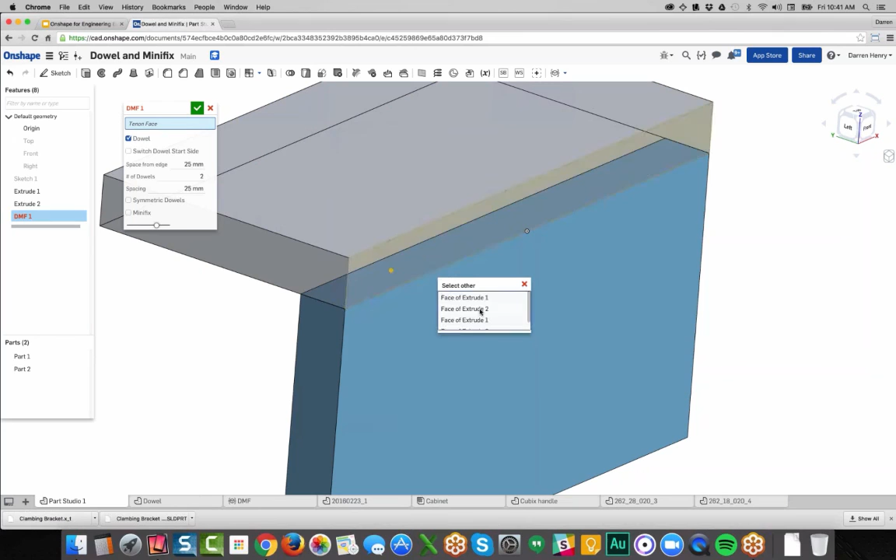So this feature allows you to put in dowels, and all you have to do is pick the tenon face, which will be, I'll use select other, this face here, and it adds the dowels and the holes. It cuts those simultaneously. You can put them on the other side. It knows not to cut because there's not a second part.

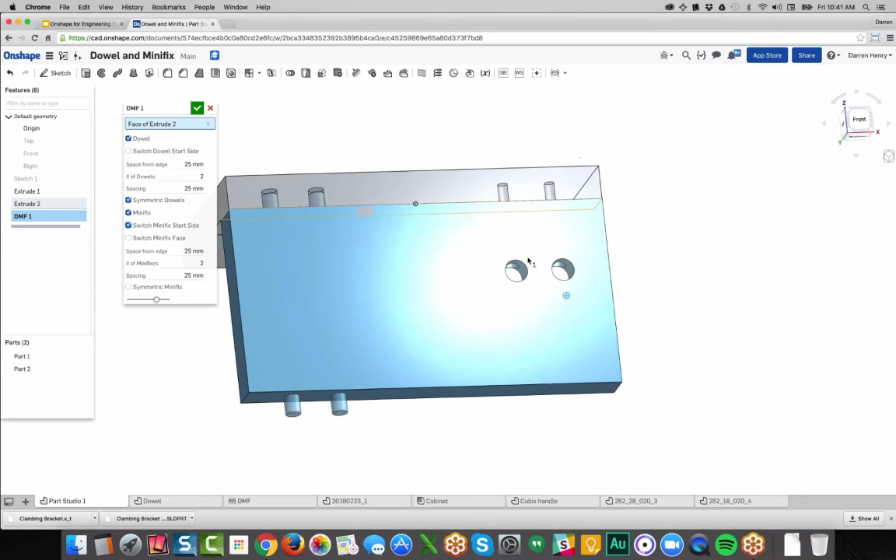And we can do the Minifix as well. So we'll add these Minifix. It's drilling a number of different holes as well as perpendicular holes or recesses for the Minifix cams. And of course, we can change the number of those as well. So this customer does this all day on multiple faces, and they're saying that they're seeing like a 30x productivity gain because they've added this type of feature. It's pretty nice stuff.

So I wanted to spend some time and talk about the feedback we're getting on what an ideal first project would be for Onshape. So obviously Onshape has a free subscription and a professional subscription. We're recommending you start with a professional subscription and you try a real manufacturing project. This is the feedback we're getting.

The first one is that it's a team-based project. The benefits we showed you today have a lot to do with collaboration and working together with people. So if you're just evaluating as an individual, you're really just going to be looking at the CAD tools, which is really a subset of what's possible with Onshape. So we're recommending that you do a team-based project, multiple people and/or locations.

We're recommending a small to medium-sized assembly. You don't just want to do part design. You want to try an assembly, and you don't want to do a massive machine of thousands of components. You want to see if the benefits apply to your company with a nice, decent size. So we're saying a small to medium assembly. Average in complexity. Again, don't throw the most complex problems at it, but don't throw simple things either. You really want to look at things you do from day to day.

And, when possible, include suppliers and customers. Try working outside your organization, the engineering department maybe, and try working outside your entire company. Get sales involved, get these product models on their laptops and mobile devices as well.